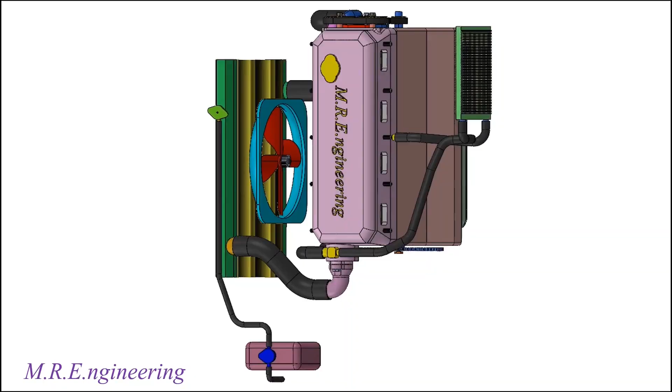My primary advice is that you always have safety in mind and be very cautious about touching any cooling system component because they can be very hot and unreliable. For example, under some conditions, a cooling fan can come on even when the engine is off and cold. This malfunction can be caused by a defective sensor, ECU, or wiring.

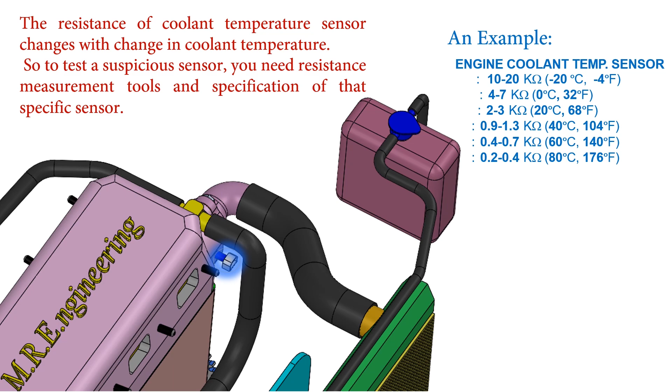To test the cooling fan if it is shared with the air conditioning system, you can turn on the AC system and see if the cooling fan comes on. In this case, if the cooling fan starts to work, the temperature sensor can be the culprit. Sometimes a visual inspection can be very helpful in finding the root of these malfunctions and defects.

So not just for the cooling system, but for all the systems that are used on your car, it's recommended that you set a schedule to service your car based on instructions noted in your car owner's manual.

And if a fault happens to your car, always refer to OEM service centers or a reputable shop and try to follow their recommendations. For example, if they find a defective hose in the system that needs to be changed and the technician advises you to change all the other hoses used in that cooling system, you should follow that guide, because these hoses are made of the same material and a corroded one can be an indication that other hoses are going in the same direction.

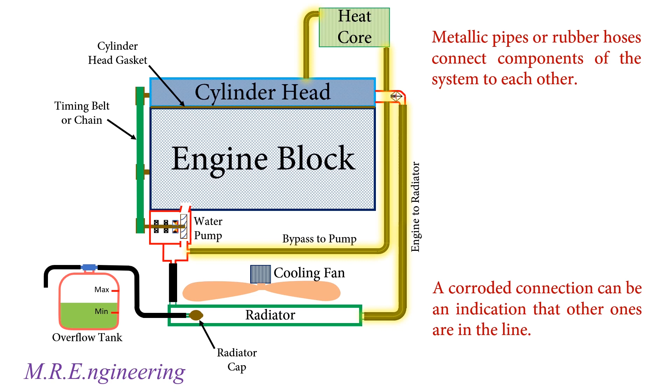In many cases, technicians recommend you change the water pump at the same time that the timing belt or chain is replaced.

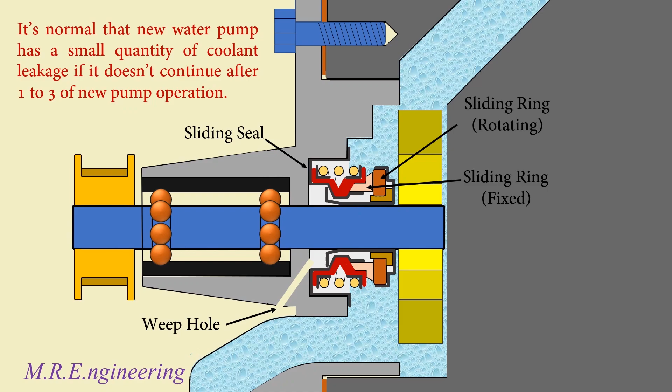Also, if the shop has installed a new water pump on your car, it's normal to have a small quantity of coolant leakage, if it doesn't continue after 1 to 3 hours of new pump operation.

After installing a new water pump, always flush the whole system of old coolant and fill it with fresh coolant at the right antifreeze concentration, because particles in the old and contaminated coolant can damage the sliding surfaces of the new pump, resulting in premature water pump defects.

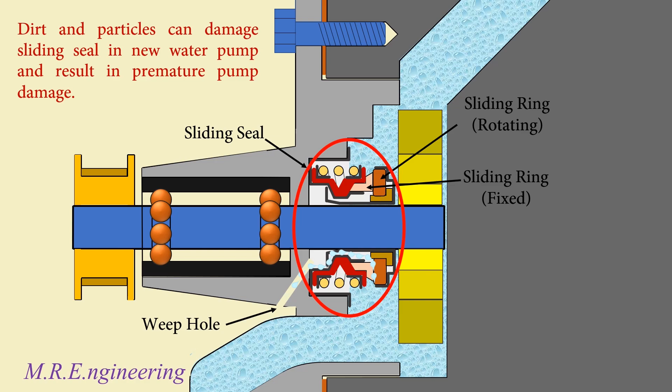You need to know that professional flushing, especially for removing deposits and scales, needs special equipment and procedures, and some shops can do that for you.

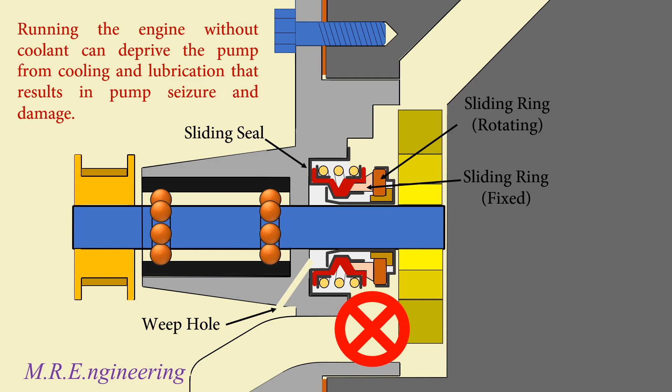Also remember that since the water pump is partially lubricated by the coolant, running the engine without coolant, other than the danger of damage to the engine, can deprive the water pump of coolant lubrication, resulting in pump seizure and failure. And maybe some guys advise you to remove the thermostat in the summer for better cooling.

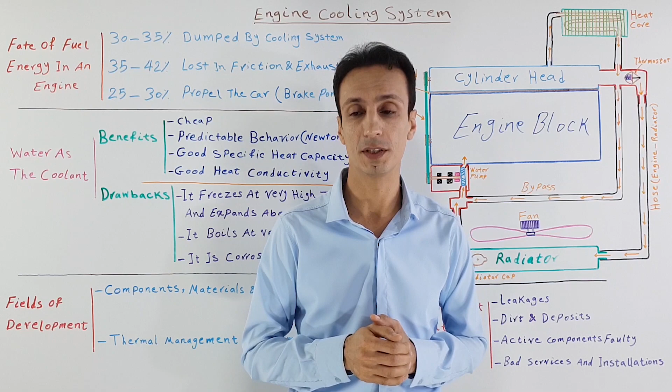Please note that the thermostat is there to make sure the engine works at optimum temperature, and ambient temperature cannot affect this optimum temperature. Also, by removing the thermostat, the coolant flows into the whole system freely, and it takes more time for the coolant to reach that normal operating temperature.

Now imagine you are driving up hills for many minutes and engine temperature has risen due to increased load and fuel consumption. Now you start to go downhill while increasing your speed. In this condition, increased flow of air over the radiator reduces the coolant temperature dramatically, and free flow of this very low temperature coolant into the engine can cause a thermal shock that can be detrimental to it.

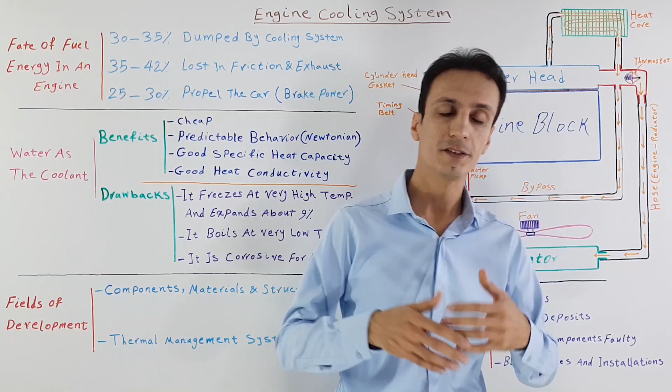So you cannot find any advice in the owner's manual to remove the thermostat in the summer. In the owner's manual, you can find recommendations about coolant type and change intervals.

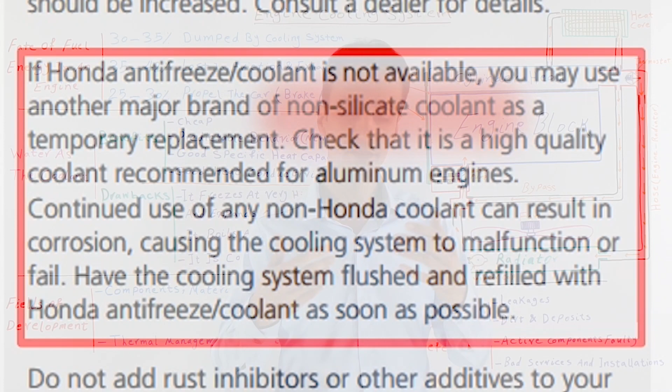For modern cars, many manuals recommend using organic acid technologies known as extended life type coolants that are usually red in color and can stand the extended warranty period of that engine. But if the owner's manual doesn't recommend any special coolant, you can use conventional coolants that usually contain greenish antifreeze. However, there is no restriction to use the more expensive extended life type coolant. An exception is old classic cars, where these OAT antifreezes may not be suitable.

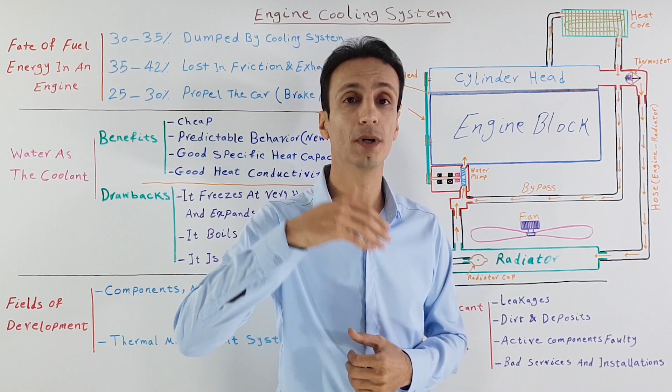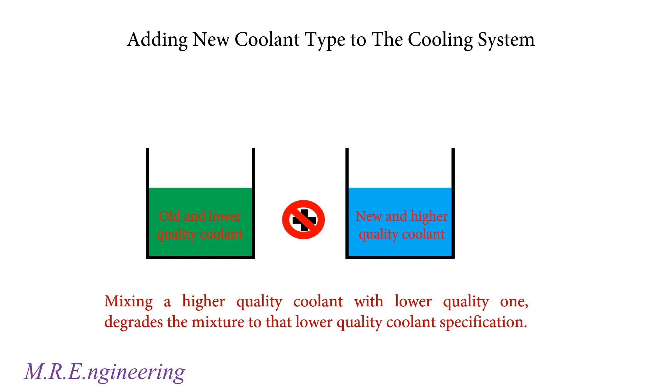If you want to switch to a higher quality coolant, best practice would be to flush the whole system from the old one and fill it with the new one, because mixing a higher quality coolant with a lower quality one degrades the mixture to that lower quality coolant's specifications. Generally, don't mix different brands and qualities of coolant and antifreeze because they may contain different additive packages that are not compatible.

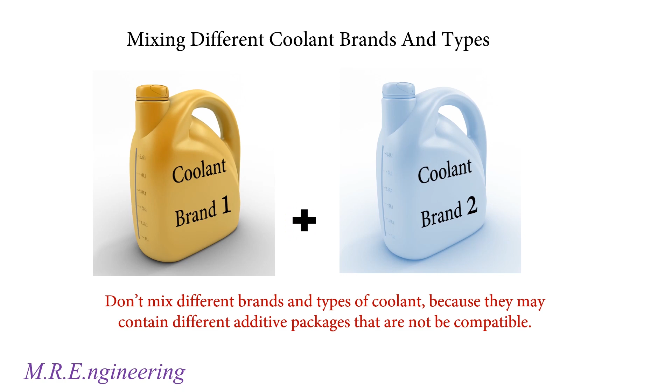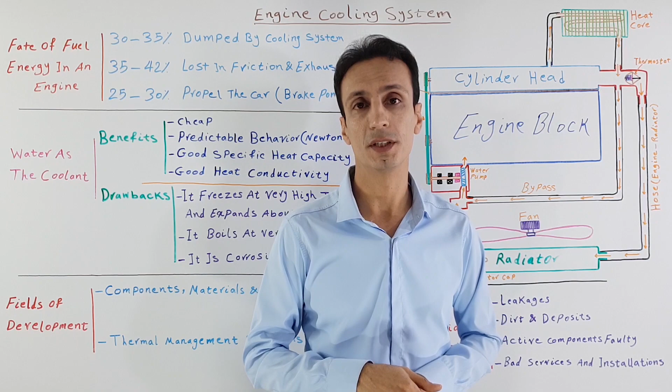Using any type of coolant and antifreeze, you need to have the right antifreeze concentration according to minimum anticipated ambient temperature. Like OEM initial fill, recommended concentration is 50-50, and for lower temperatures you need to increase antifreeze concentration. But remember that going over about 70% concentration can negatively affect coolant heat dissipation and even raise the freezing point, and with less than 30% concentration the coolant cannot provide adequate protection for metal parts.

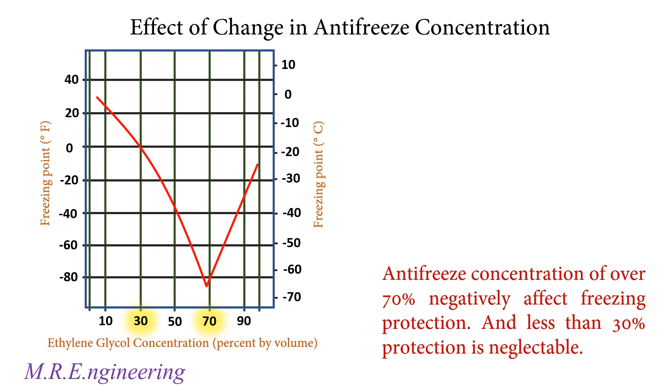Now if you have a coolant and don't know its antifreeze concentration, you can visit a service shop to measure that for you almost accurately using a special tool known as a refractometer.

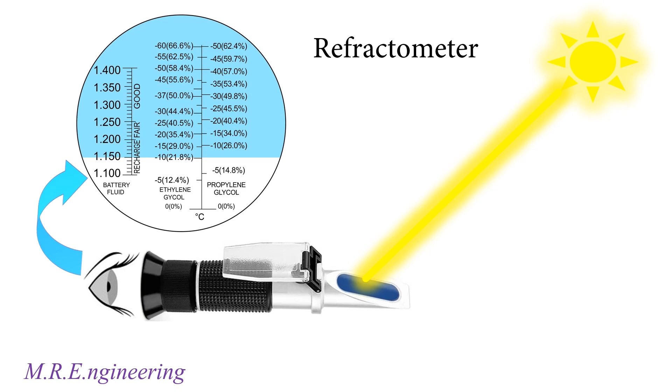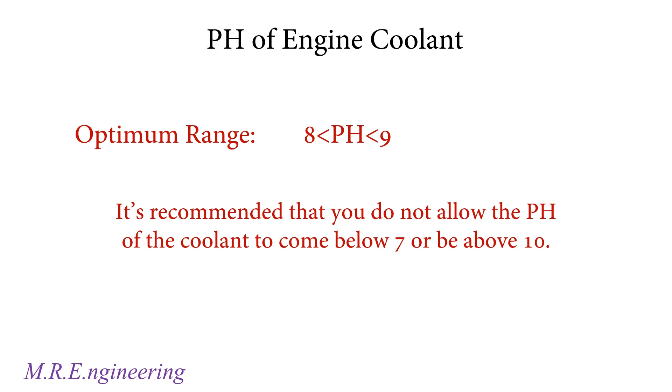Also, pH of the coolant can be a measurement for its quality. This is because engine high temperature accelerates inhibitor consumption and breakdown of glycol into acidic products that lower the pH of the coolant. So it's typically not good practice to allow a coolant to operate at a pH lower than 7. In this case, remember that pH number is not necessarily an indication of inhibitor concentration.

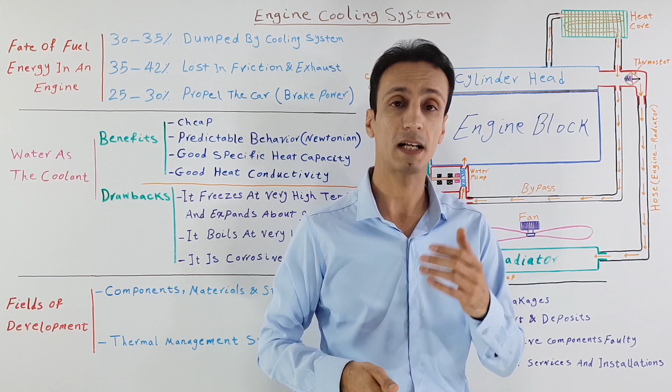And if you want to boost antifreeze concentration, never use alcohol for this purpose, because alcohol has a lower boiling point and flash point. And remember that glycol is flammable too, so never weld or use open flames near a leakage that involves antifreeze.

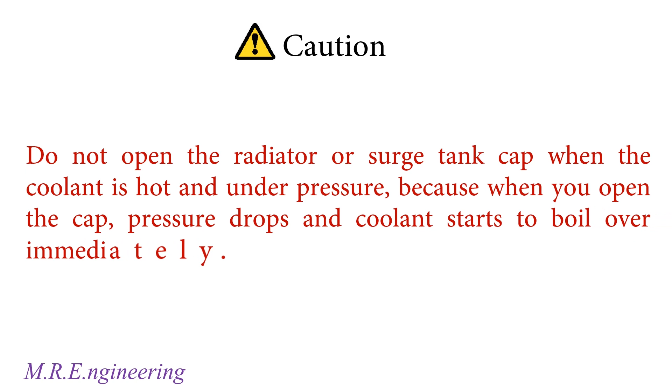Also, if you want to open the radiator or cooling system surge tank cap, never do that when the coolant is hot and under pressure, because coolant under pressure has a higher boiling temperature, and when you open the cap, the pressure drops, making the coolant boil over immediately. Even though radiator caps are designed to not fly off the radiator neck, this boiling coolant can burn your hands and face.

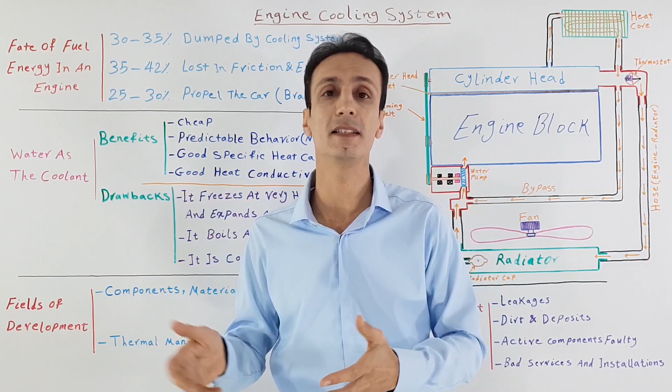When you want to make a coolant mixture, always use the right amount of water with good quality. Good quality means clean, drinkable, soft water with a low amount of calcium and magnesium compounds, and it's highly recommended to use deionized or distilled water with maximum total hardness of 170 ppm. Snow and rain precipitation are great too, only if the air quality is good and you collect them dirt-free.

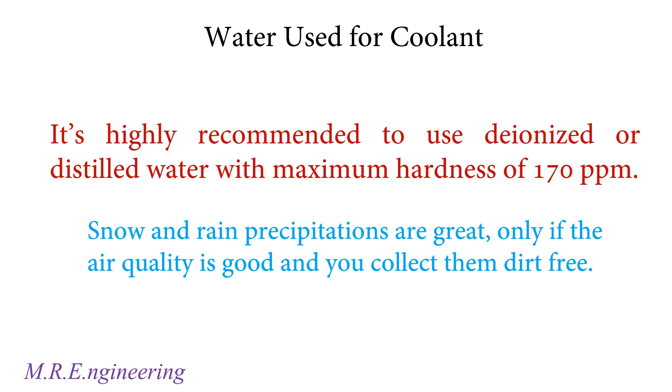At the end, remember that for your own safety, avoid contact of antifreeze with your skin and inhalation of its toxic vapors, and try to keep this sweet liquid out of reach of kids and animals.